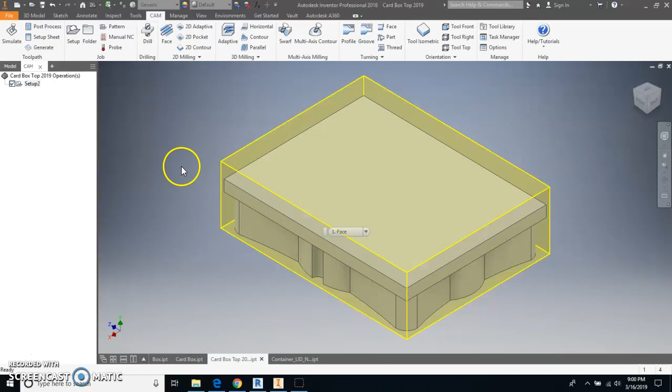The first thing is I'm going to make sure I'm in my setup number 2, and I can click Tool Isometric to get the part oriented so I can see it. Then I'm going to do a facing operation.

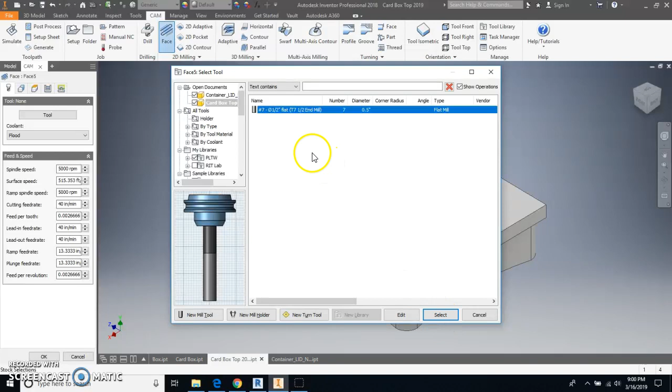Now the first thing I'm going to do is select the tool that I'm going to use, and I'm going to choose the number 7, 0.5 inch tool, because that's the largest one we have. I'm going to say OK.

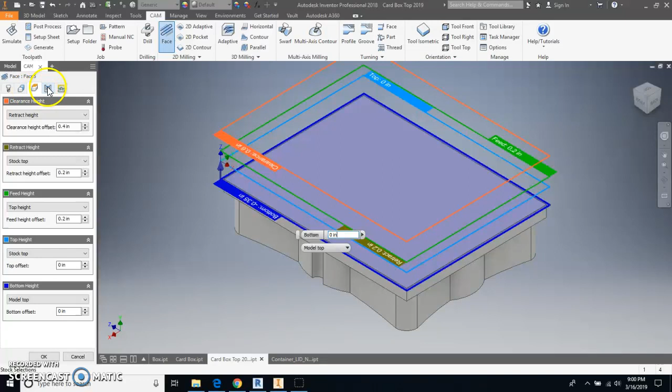The next thing over is stock selections, and I don't have to pick anything here. Retract height and all of this stuff doesn't need to be changed, nor does this tolerance work. We don't have to change anything here. The only thing we might need to change... no, we should be okay. So I'm just going to go down here and say OK.

What you'll see is that it generates my tool path for me. So I'm going to hit simulate, and I'll do my simulation.

By the way, you can speed this up by doing these kinds of things, right down here. You can pause this, you can do whatever you like to make it go.

I'm taking a look at this right now, and what I'm seeing is that on the last cut, this thing is spinning clockwise. Let's run that again. So what I want to do is make sure it's spinning clockwise, so it's turning into the edge. When it's going down the edge of the part, it's turning into the part, trying to keep it from blowing out of the part.

Okay, looks pretty good. So I'm going to pause for a second here. I wanted to show you something.

This is called the step over. You can see the blue line that represents the center line of the tool as it's going down the part and back and forth and back and forth. I'm going to actually click on my tool here.

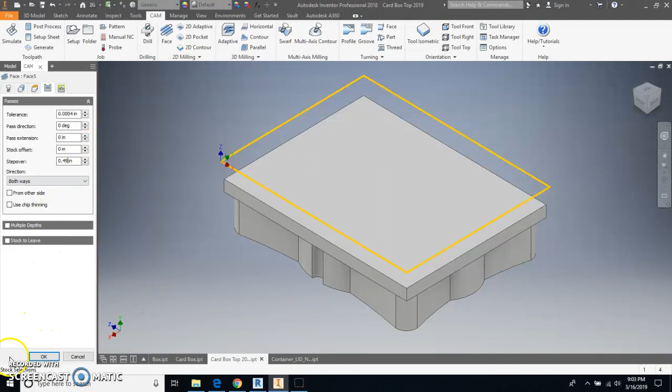We go to the second to last tab. I'm going to change this step over from 0.75 to 0.49. What this does is make the distance between the lines a little bit different, a little bit larger.

So you'll notice that we finish at the opposite ends with this. So I'm going to hit simulate and run this.

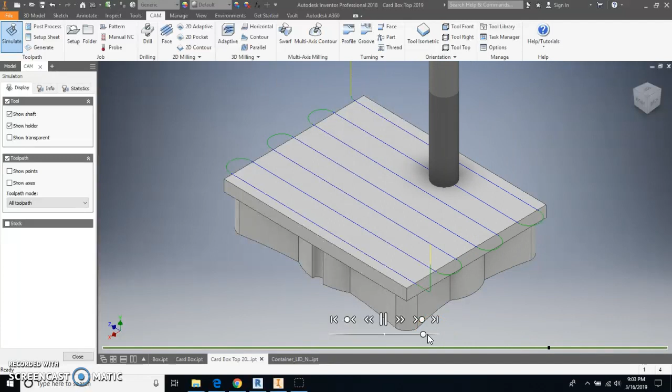Now hopefully what happens is that as this part is going down this way on the edge, it's turning into the edge of the box, so that hopefully we get a little bit less chipping out. Here it's turning into the box, and here it is also turning into the box as it takes material out.

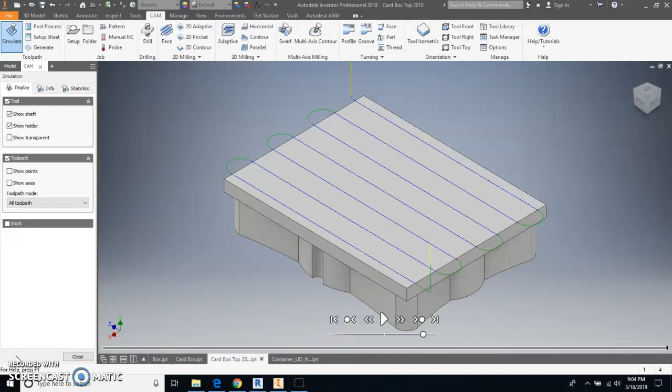So much for that. Next thing is going to be about setting up our pattern on the top.